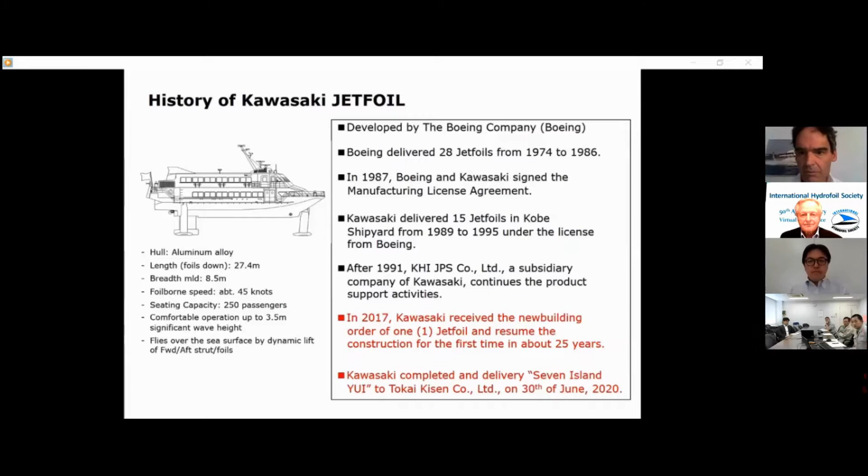I can summarize the special features of Jetfoil as below. Jetfoil's foilborne operation offers super smooth and comfortable ride, so passengers on board can hardly believe they are traveling on the sea. Passengers can enjoy seasickness-free travel even when the sea is rough and waves are high. Also, thanks to super high speed, Jetfoil can offer swift passenger services and reduce travel time. It's also important that Jetfoil does not generate wake and does not bother nearby boats. Therefore, in Japan, Jetfoil is widely recognized as the essential means of marine traffic for access to and from all the major outlying islands, or in inter-island routes.

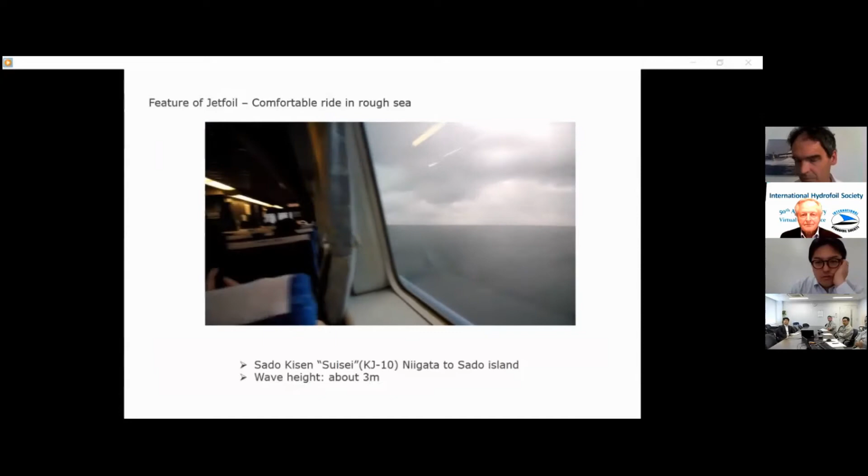One important feature of Jetfoil is comfortable ride, even in rough sea. This video is taken in the Jetfoil, cruising at high speed on a harsh winter day. Wave height was almost 3 meters. It was rough sea, but the cabin was so comfortable, and some passengers enjoyed lunchbox or snacks.

Kawasaki has restarted construction of new Jetfoil after 25 years of interval. I would like to explain the background of resumption. I can summarize 3 points. Point number 1: JETFOIL is essential traffic means for islanders. Point number 2: aging of JETFOIL in service. Point number 3: no replacement of ultra-high-speed passenger ship other than JETFOIL.

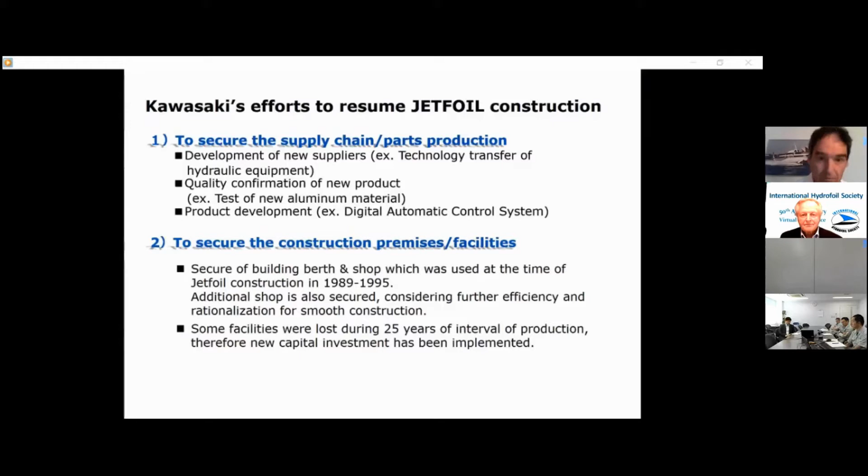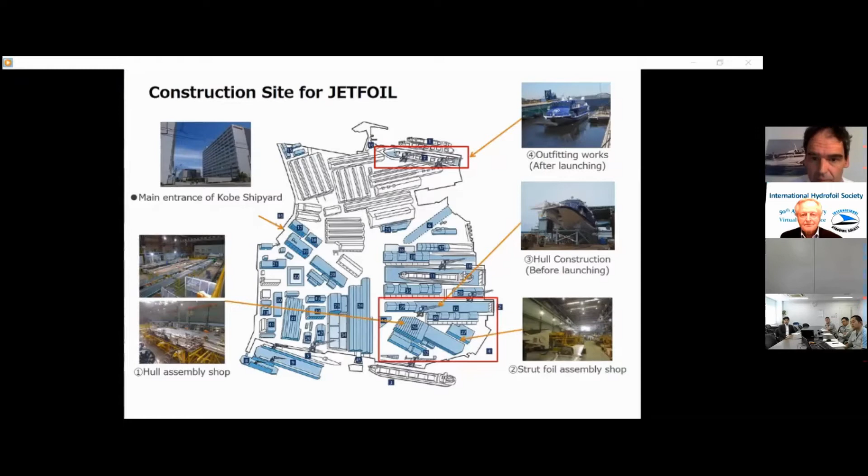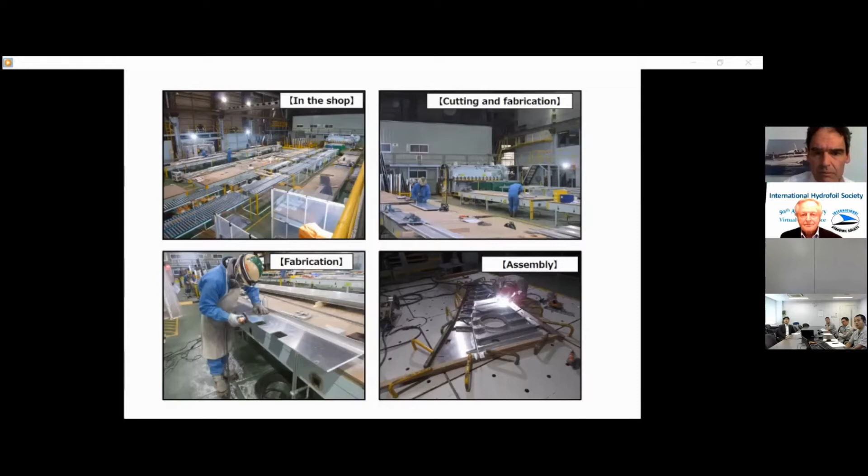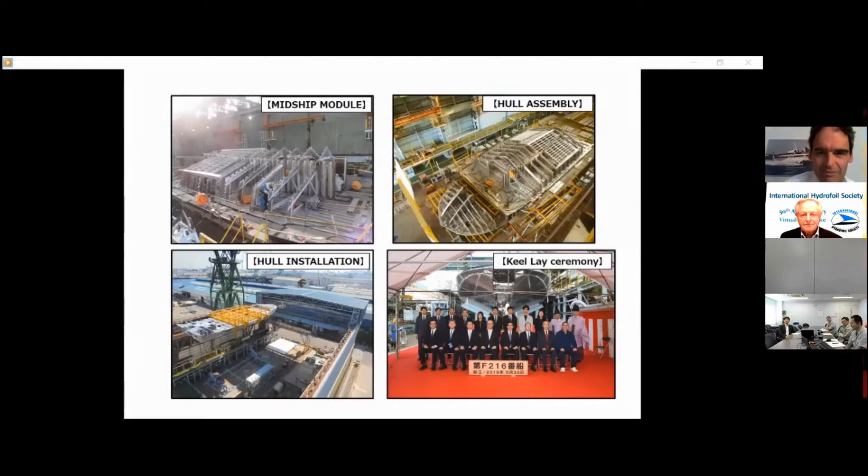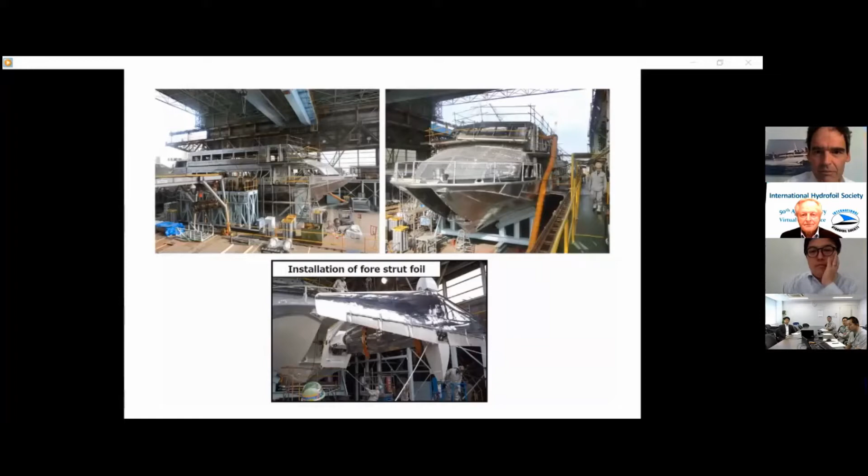These are the processes near to final assembly, and launching on the 26th of March 2020.

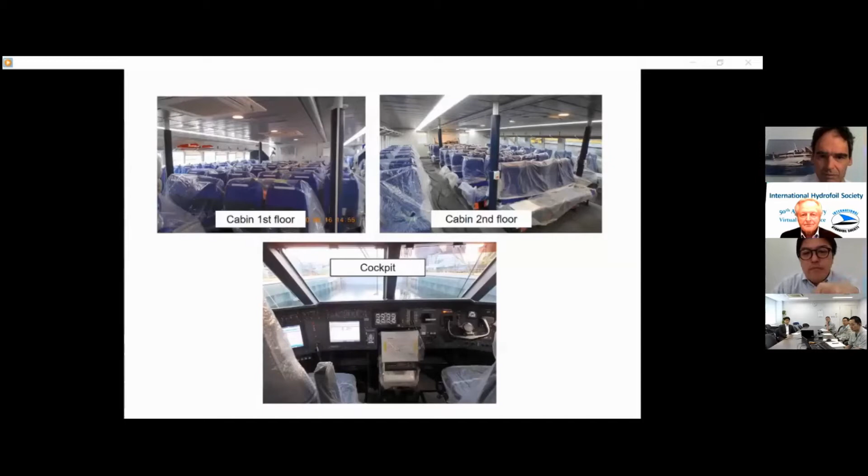Number 3. KHI's vision for jetfoils to the future.

Necessity of jetfoil for islanders and tourists. Compared to airplane and ferry, jetfoil has huge advantages, from the viewpoint of being fast and stable. Jetfoil is very important infrastructure for islanders and tourists.

For instance, in the case of access to Tokyo Islands, approximately 70% of passengers are using jetfoil. This fact shows passengers are satisfied with stable, comfortable, and short trips by jetfoil.